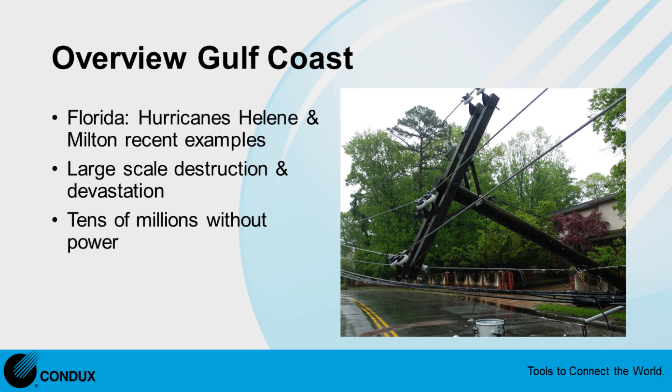So while this type of work is being done around the country, there are areas that are driving undergrounding projects. Here's one, the Gulf Coast, specifically Florida. They just recently had two major hurricanes, Helene and Milton, large scale destruction and devastation with tens of millions of people without power. But that's obviously not just Florida.

You've got Texas, and in Texas they had Hurricane Beryl in July of this year. The thing that's different about that is it wasn't just the wind and the rain and flooding, but extreme heat. So you had millions really without power, sweltering, dying from the heat. It's really become one of the major target areas for underground efforts. So that's what's exciting about what's going on down on the Gulf Coast.

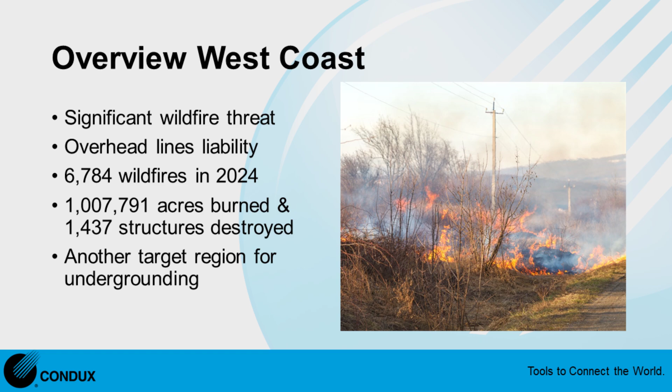If you look to the West Coast, there's a little different set of circumstances going on there. Wildfires are not only a threat to overhead lines, but overhead lines have been identified as the cause in some major wildfires, and that's impacted large utilities. When you look at some of the statistics here, over 6,700 wildfires in 2024, over 1 million acres burned, and almost 1,500 structures destroyed. So again, this is another target region for undergrounding projects.

You can see there's a lot of undergrounding going on here, and some actions are actually taking place. Look in California, the CPUC has some long-term programs for utilities. You've got PG&E with over 10,000 miles of undergrounding programs going on. SoCal, SCE has a program in place. Utilities and cities throughout California are looking to undergrounding just for these simple reasons. So you've seen the Gulf Coast with the weather, you've seen the fires in the West Coast, all targeting why we should be looking at bringing more of our lines underground.

Hey Jim, I'm just going to comment on that real briefly too. We know at PG&E they're going to spend, their CEO Patti Poppe came out and said we're going to rebuild our company after bankruptcy, from the underground up, a little bit of a play on words. We're going to spend $15 to $30 billion on that 10,000-mile program, and that's just about 10% of their program.

I would mention one other city in California, just for the fun of it, Anaheim. About 35 years ago, Anaheim decided they were going to go underground, and they've undergrounded almost 80% of their distribution system, because really they take transmission voltage from Edison, and they're about 80% underground. They've got some great numbers now that talk about what it actually costs to operate and maintain. So when we talk about the total cost of ownership over the life of the asset, we can start to look at utilities like Anaheim to say, what has their experience been?

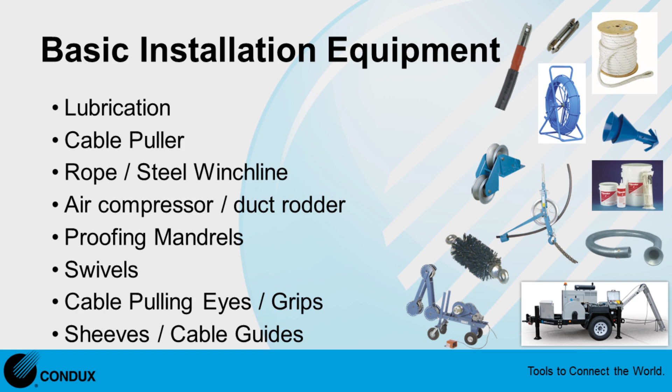Cole? Yep, thanks, Jim. Here I have listed some of the basic installation equipment you are likely to see on a job site, from lubricant to the cable puller itself. Looking through this list, each of these products play an important role in ensuring a successful install, and I'll touch on a little bit of these as we go further.

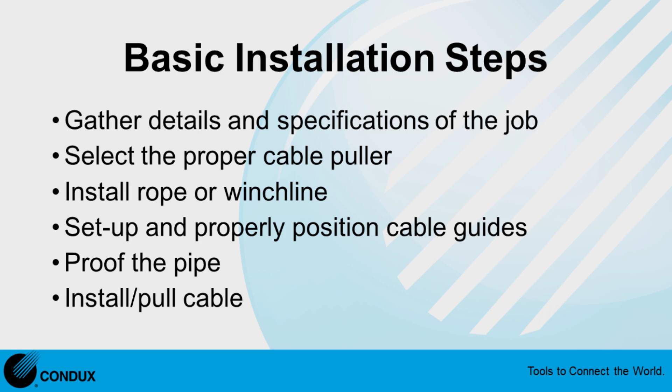So here are the basic steps I will cover for underground cable installation, starting with gathering all job specs and details prior to the install, to selecting the proper equipment and setting it up, and then probably most importantly, proofing the duct.

Hey Cole, I want to comment on something. I think we really need to make an emphasis as planners and engineers in this industry, as we're not building our grandfather's distribution system anymore. We're building the 21st century distribution system of specifications. We cannot use specs for things like cable pulling that were written in the 50s, 60s, and 70s. We've got to look at advancements in technology, equipment, and lubricants, and get more out of it. That's the job of the engineer in charge of the job, probably the civil or electrical engineer. They've got to really take a look at those specifications. So I'm just going to get on that high horse for a moment. Back to you, Cole. Absolutely.

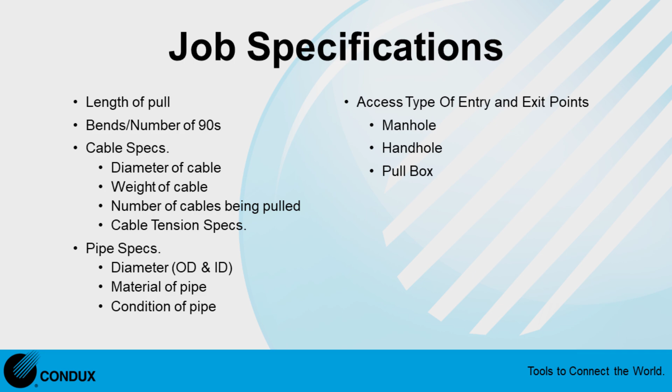It is important to gather as much detail and specifications of the job prior to the install as possible. The more information you can gather before entering the job site, the less surprises you're going to have. So here are listed some of the basic specs you can try to find to best prepare yourself for that installation. Each of these will help you determine what equipment you'll need and help you strategize a plan for the installation.

First off, here's a quick formula you may use to provide a ballpark estimate of the tension loads you may see for an upcoming job. To find the tension, you use the length of your run, multiply that by the weight of your cable per foot, multiply by 2 to the number of 90-degree bends you have, and then multiply all of that by the coefficient of friction. For example, an 800-foot run with cable weighing 2 pounds per foot and 3 90-degree bends comes out to about 6,400 pounds.

Just below that, you can see that same formula without lube, showing the great importance lube takes in ensuring a successful installation and greatly reducing those tensions. The abstract factor in that formula is the coefficient of friction, and the difference with and without lubrication basically speaks to that coefficient. It's really important that we understand that and decide going into the project whether we're going to use lubrication, and specify that one way or the other.

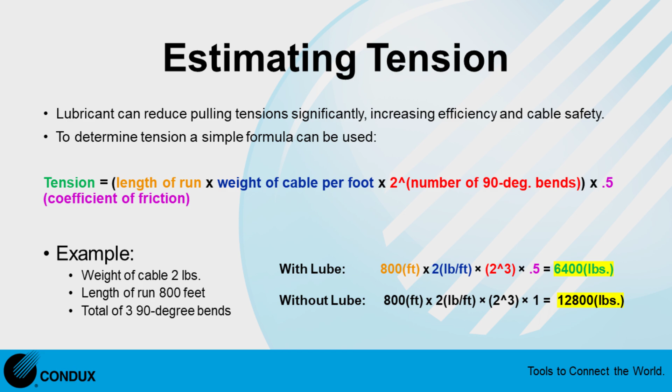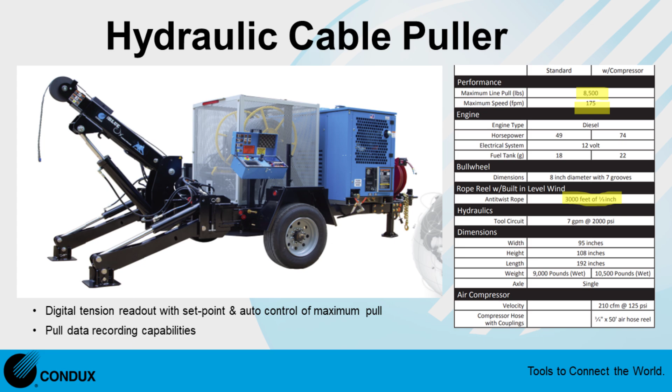Based off that previous calculation, you can see this Blue Ox cable puller would be fully capable of doing that pull, coming in at 8,500 pounds of pull force with 3,000 feet of rope preloaded on that machine.

Cole, let me ask you a question about inspections. When I worked at Tucson Electric, we had company inspectors in the field looking at civil installations like that. In most utilities you work with, are you finding they've got an inspector or a contractor construction manager in the field making sure specifications are being met, the equipment is the right size to pull it safely, and looking at the rope characteristics you just mentioned? Are you finding utility inspectors in the field looking at this kind of stuff?

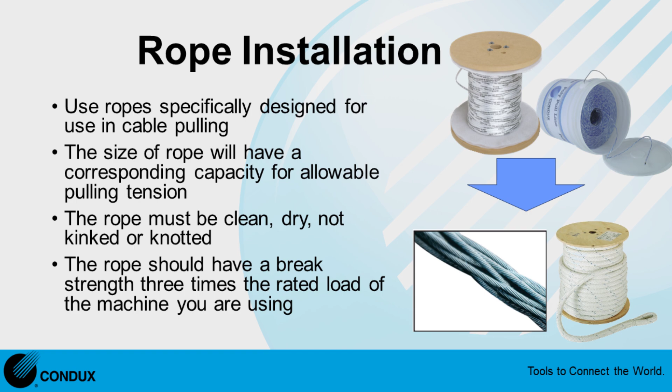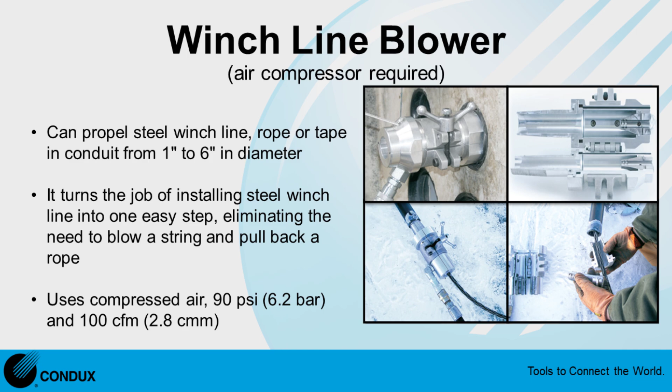So here we have the winch line blower. Using the winch line blower, the extra step of installing that lightweight rope first can be eliminated. It's paired with a heavy-duty rubber carrier to blow in the larger, heavier rope all in one shot, saving a lot of time compared to blowing in a lighter rope first and then pulling the larger rope in behind it.

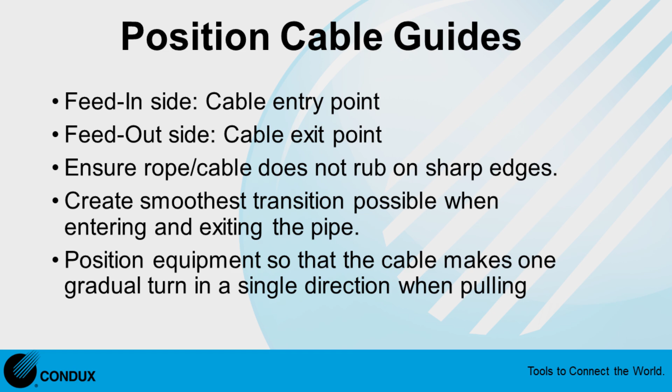Next is positioning the cable guides. This will likely vary between job sites as each site is a little different. When selecting and positioning these guides, it's important to make sure the rope or cable is not rubbing on any sharp edges, creating the smoothest transition possible when entering and exiting the pipe, and making sure the cable makes one gradual single turn as it comes in or out.

This next one is a big one. I cannot stress enough the importance of proofing the conduit prior to installing the cable. Taking the extra time to proof the duct can save you a lot of time and money in the long run. It also greatly increases the odds of a successful install, since you're not entering the duct blindly.

Looking at the mandrels, the most common are wire brush mandrels. You can also use aluminum or wooden test mandrels to prove joint integrity of the duct or test for out-of-roundness. There's also a rubber duct swab, which works well for pre-lubing the duct. I know in some cases people like to pre-lube the duct as well as lube during installation.

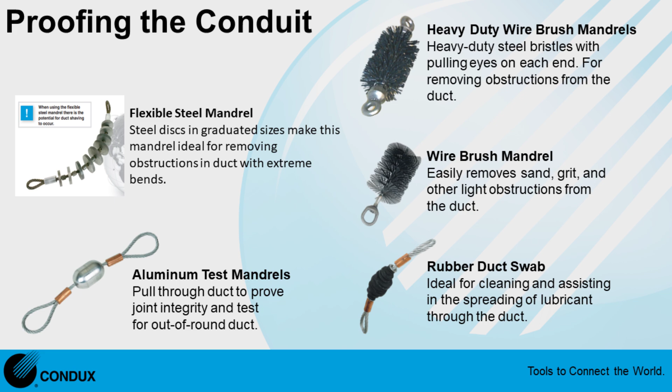So what's the craziest thing you found in a duct when you ran your mandrel through it? I mean, besides dust and dirt, are you finding critters or anything dead? Animals, all sorts of stuff. Darren, you find anything down there on the West Coast? Absolutely, I've heard of rattlesnakes. There you go, that tops it.

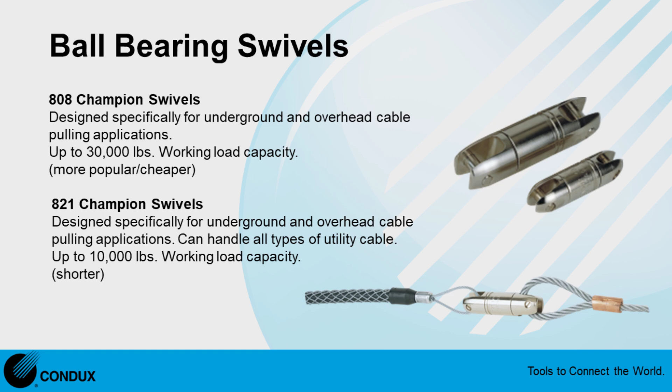Another important tool that should always be used is swivels. Swivels allow the cable to turn and bend freely through the duct without pigtailing and causing any extra tension or unwanted binding of the cable.

We also have lubricant. Lubricant is the key ingredient for a successful pull, providing protection to the cable and equipment by reducing overall tensions. Here's a quick formula to help determine how much lubricant you need for a specific install: take the length of your run times either the inner diameter of the duct or outer diameter of the cable, and multiply that by the coefficient of friction. For example, 500 feet with a 4-inch duct, you're going to need at least 3 gallons of lubricant. I say at least because there's really no such thing as having too much lubricant for a pulling application.

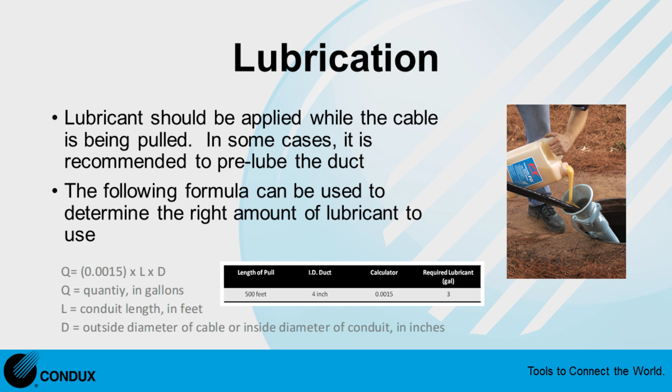Is lubricant something that Condux International provides, or is that strictly equipment? We do not provide the lubricant ourselves, but we do have some recommendations. Okay.

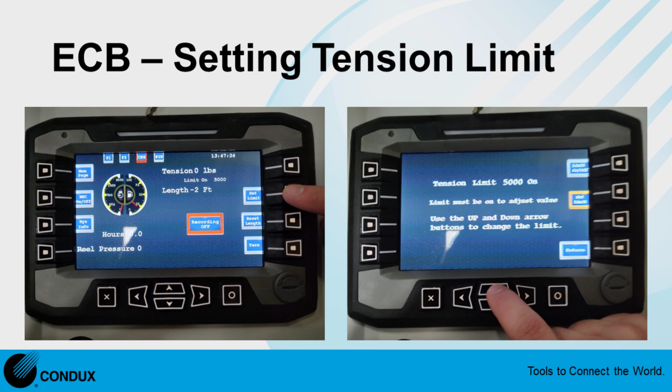That's great, thanks Cole. There's some questions on there, I see. Mike? No? Okay, well thanks Cole.

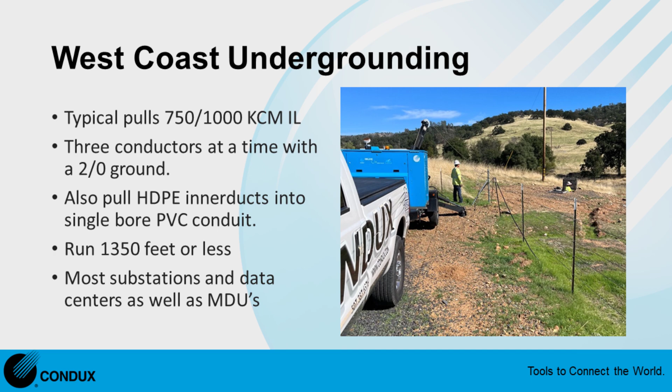No, I'm sorry to interrupt you, but yeah, the job site layout is a challenge in this particular case. Absolutely.

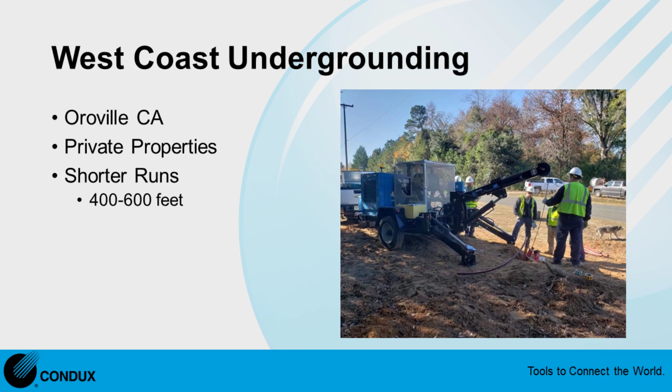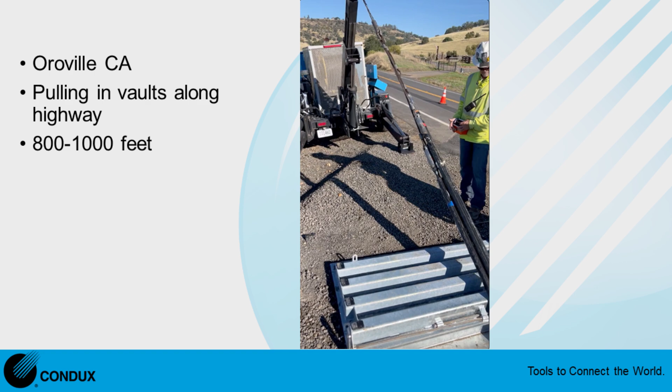Also Oroville, California. This is also pulling on the highway. These were about 1,000-foot runs. You can see we're actually using the pulling grips and swivels and everything. But yeah, it was phenomenal.

These are contract crews that are working for PG&E or SMUD or whoever the incumbent utility is up there. Yes, sir. It was a co-op that I was dealing with, and yeah, they're tied in with both of them.

So are you on the job site, Darren, when you said you cover the West, you're the sales technical representative, so are you out there on jobs like this typically to make sure that the contractor is properly using the equipment or has any questions, or do you share that job with Cole or Cole's team, or how's that work?

Well, Cole, he's a little more technical than I am. He's usually at the mothership, if you will. I am definitely a field guy, and yes, I work individually with contractors, co-ops, municipalities, so on and so forth. But I basically train and familiarize people with our equipment.

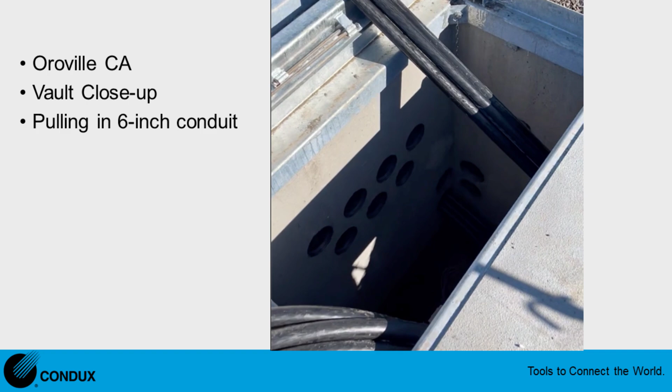Are you guys working on any developer-driven projects like big solar farms or things like that where you're trying to put in utility-grade or utility-scale solar or renewables? Yeah, we are, Mike. We'll be talking about that later on, but yes, we are. Vastly, that whole energy segment is just exploding.

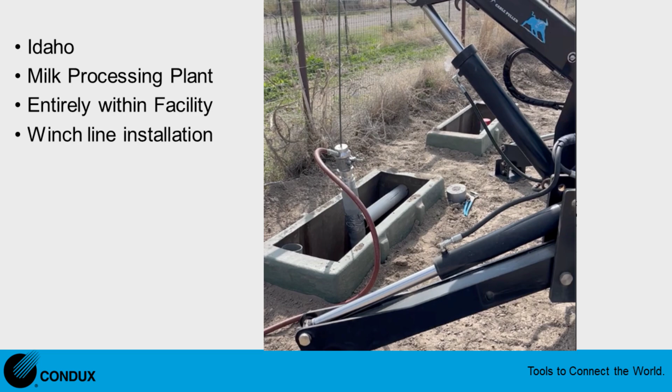This is actually the same shot. This is the cable coming out after a successful pull.

So I can't let Paris go by without saying you guys are Condux International. Jim, are you doing work, are you providing equipment to contractors and utilities around the world, or predominantly in North America? Primarily North America. There was a time when the company did do much more outside the U.S., but we're concentrating right now in the U.S. market as it's exploding.

I don't know why you need to leave North America, frankly. There is so much work to be done. Well, you're here, right, that's it. There is a lot, but...

Undergrounding in all different countries, once they get to that sophistication, we're prepared to handle that. A lot of countries are further along than we are on undergrounding, a lot of the developed world. If you go to Western Europe, there's a lot of underground infrastructure you just don't see, compared to some of our older cities where you see quite a bit.

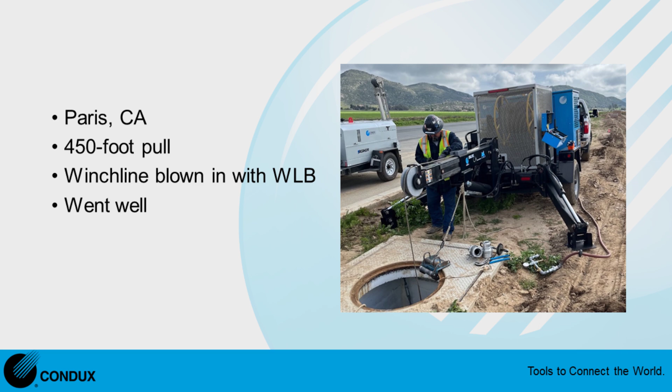Anyway, okay Darren, next slide. And as you know, the cities, that's the hardest part to get undergrounding, right? They seem to be doing it out in the suburbs and in the sticks, but it's really hard to get that kind of compliance in the cities. Yeah, yep, okay, go on Darren.

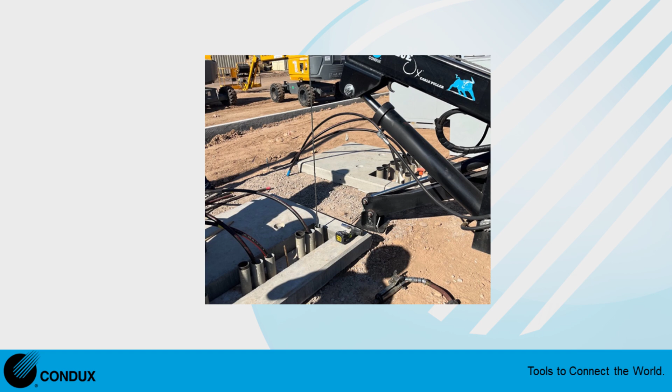Okay, this one was actually Mesa, Arizona, or actually it was Glendale, Arizona. My bad, I've been to many cities in Arizona. This was an MDU, or multiple dwelling unit complex, an apartment complex if you will. I was out there with SRP, and we were just pulling in cable to all the individual pads.

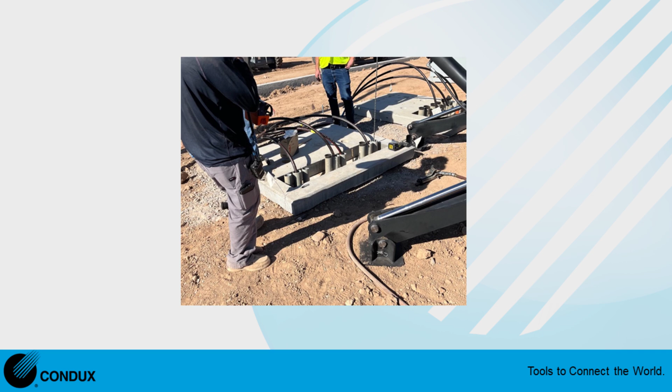Also Arizona, same project, and just pretty much the outcome of the cable coming out after we were done with a successful install.

This one might have been, just going off of memory gentlemen, it could have been one of the data centers, could have been a substation, but yeah, obviously another successful pull.

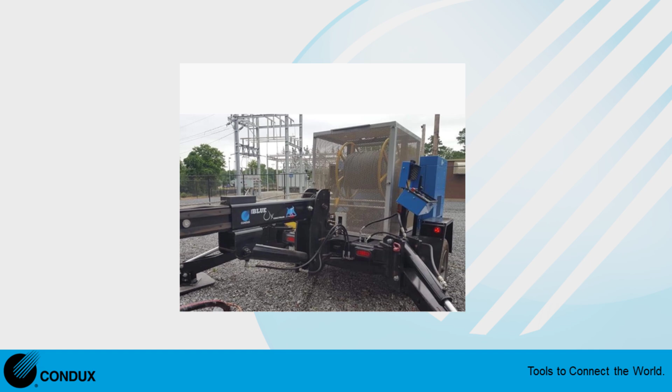This one was Facebook Data Center in Mesa, Arizona, working with a high-end contractor out there, demoed our Blue Ox. Everything went phenomenal, pulling in very big cables. I think there were 1000s, 3 of them with the ground, going into 6-inch conduit multiple times.

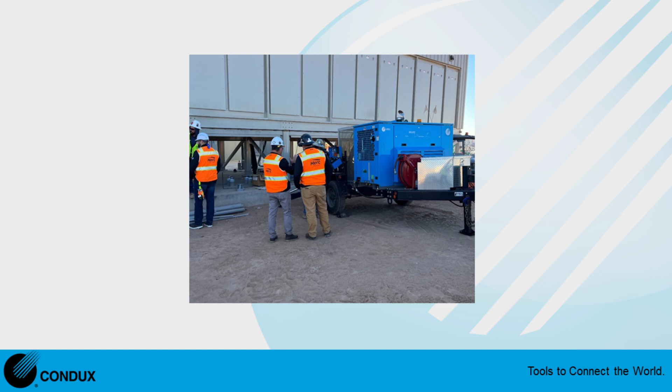And I'll tell you, for everybody on the call, we're seeing a lot of data center activity, and it's due to the explosion of AI. AI is not going backwards, it's requiring more and more of this kind of solution. So this is a good example of that.

And those data centers, Jim, require a very high degree of resiliency, not just reliability that's measured in minutes, but resiliency, which is the ability to withstand these high impact but low probability events like hurricanes. Somebody asked about wildfires here in the audience and such. These data centers cannot afford to ever be out, so at the end of the day they've got to have a very, very resilient system. And in my book, that means underground.

And then Darren, I'm going to ask you another question here too. I think you've got a couple slides left, but you said you've got a lot of successful projects. What do you run into when something is a little bit more challenging, that doesn't run perfectly? What kinds of things do you see with maybe new planners, engineers, and data scientists that are kind of new to undergrounding? What word of advice could you give them to look out for?

Well, I'll tell you, like my colleague Cole Herding said earlier, it is absolutely imperative that you prove the conduit. The majority of my failures are always because of the integrity of the conduit. Some guys like to cut corners and try to save time, and I'm like, gentlemen, you're not saving that much time. In the long run it's going to cost you more, and every single time it literally does. Great advice, good, thanks for sharing that. Absolutely.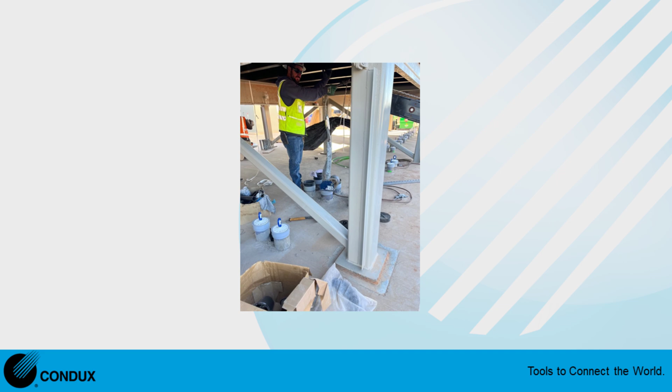This one is actually a QuikTrip data center, a gas station of all places. I didn't realize that a gas station needs so much data, but obviously with all the rewards programs going on now and everything. But this was actually the end of the pull too, everything came out successfully.

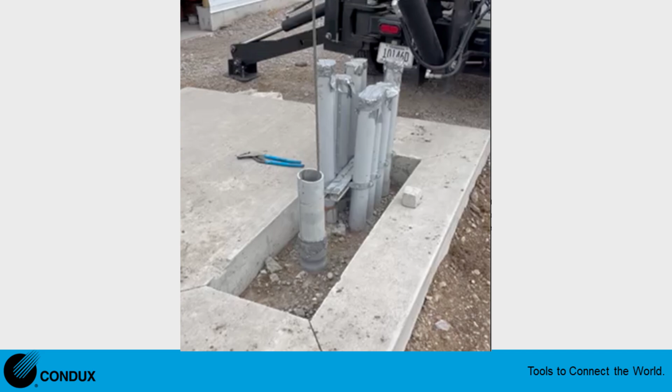This is Idaho, this is actually in process of pulling the cable. I believe the next slide is going to show the success of it. There it is, so yeah, the cable's coming out, everything went phenomenal.

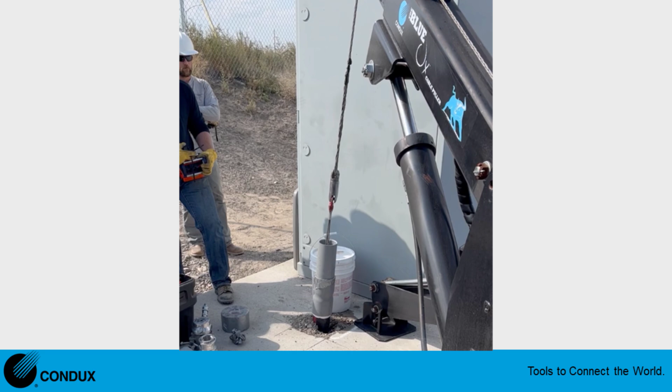This is also the same Idaho job, a milk processing plant. Again, end of a successful pull. You can see the swivel's already out, and obviously the conductors came out.

All right Darren, well thanks Darren. That's great, absolutely, a lot of information.

Well, thank you. So let's take a look at undergrounding projects on the Gulf Coast. There's really 4 situations occurring here. Undergrounding, which is surprising, is not as aggressive in Texas. We talked earlier about costs - there's hesitancy because of the concerns over the cost, which has been a little bit problematic. Published reports estimate about $50 billion it's going to cost just to go underground in Houston alone.

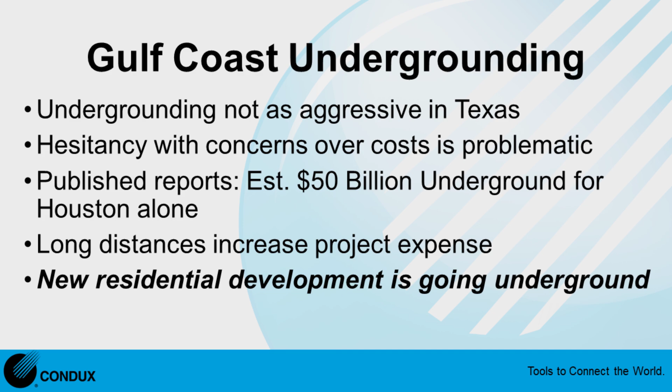And the long distances aren't helping in Texas, right? That's just going to increase the project expense. But as I mentioned earlier, the new residential development is going underground, clearly wanting to please end users who have made this point of a better total cost of ownership. So at least in the residential areas, they're getting it. Maybe not in the cities right now, but nonetheless, residentially.

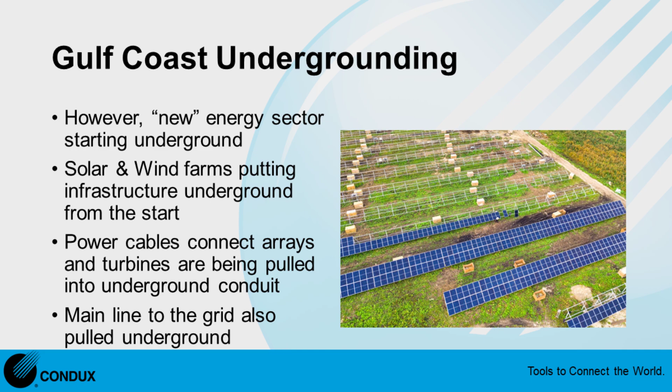But if you look at the next chart, Mike, this fits into what you were talking about before. This is not your father's industry anymore, right? The new energy sector is starting underground. They're starting to get into it with solar and wind farms. They're putting infrastructure underground from the start now, so they're not adapting, they're actually speccing it in. You're looking at power cables connecting different arrays and turbines, being pulled into underground conduit. And mainline to grid is also being pulled underground. So this is becoming a really targeted vertical market for our organization.

And then, of course, the process for pulling cable is really similar for solar and for wind. The good thing is it's more straightforward job site layouts, unlike what you saw there from Darren earlier. But there are significant pulling projects going on. For example, there's a 50,000 total feet on a single solar farm going up, I believe in Texas, running 1,000 to 2,000 feet in length, vault-to-vault, 8-inch diameter conduit. So it's heavier and larger cable going underground. It's big, so we only see this opportunity for undergrounding only going to grow.

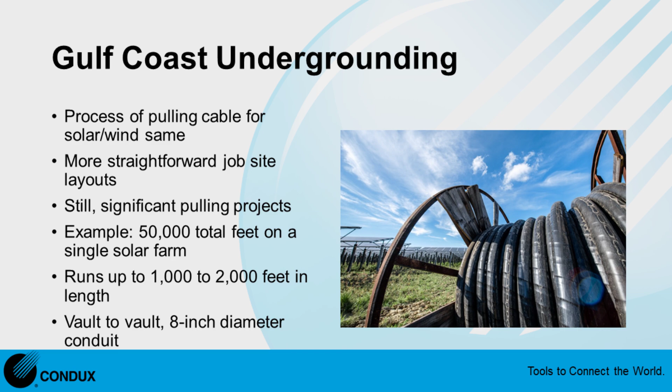We're really happy to share this information with you and hope it added some value to what we see as a growing business segment in undergrounding. And Condux is expected to be a driver in this industry. Well, good. Thank you very much.

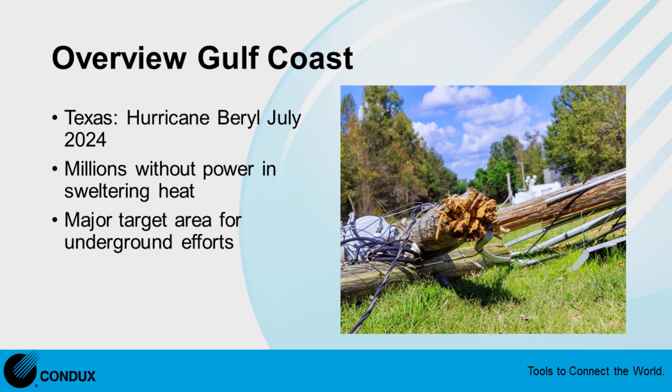And people are just tired of having power out for long periods of time and being under distress. It's going to come to the point where we talk about total cost of ownership - that calculation has got to include end user satisfaction. More people are not happy with the situations they've got, whether it's fires, rain, wind, or flooding. They need power. They're tired of having to restock their freezers and refrigerators, going without, and not being able to get gas because the stations are all down. I mean, it's going to get to the point where undergrounding, I like to think, is going to be a major play for municipalities going forward. I just think people have seen it.

I think you're right, Mike - storms. Look at just 2 or 3 storms in a row. You don't even have a chance to catch your breath, and another one's hitting you, right? So that's a good question.

Somebody's got a question about horizontal directional drilling and any considerations for HDD bores. Let's see, are you guys going to get involved in anything like that? Do you have any equipment that helps do a horizontal directional drill, or is that outside of what you do?

Cable pulling for a directional drill is the same as a conduit, I would imagine. Any comments on that? Have you pulled cables through directional drills that go under rivers, highways, or railroads?

So the equipment that we'd most likely be dealing with are our directional drilling swivels. Our swivels are double sealed and greasable to keep any contaminants out, and they've really proven themselves in the industry and are often the go-to. But that's probably the most we deal with for directional drilling.